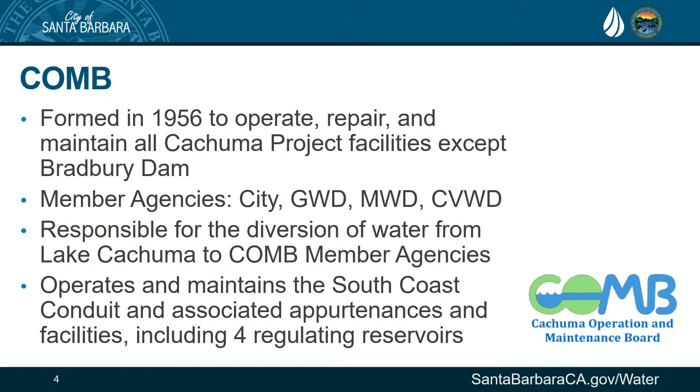COMB is a joint powers agency formed in 1956. They operate, repair, and maintain all Cachuma project facilities except for Bradbury Dam, which the U.S. Bureau of Reclamation maintains control of. There are 4 member agencies in COMB, including the City, Goleta Water District, Montecito Water District, and Carpinteria Valley Water District. COMB is essentially responsible for the diversion of water from Lake Cachuma to those member agencies via the Tecolote Tunnel and the South Coast Conduit, which carries water all the way down to Carpinteria.

In April 2025, COMB and U.S. Bureau of Reclamation staff decided to inspect the portion of the South Coast Conduit that travels within the Sheffield Tunnel. The Sheffield Tunnel is a 6,100 foot, 6-foot diameter concrete tunnel that houses the South Coast Conduit. This portion of the conduit is 30 inches in diameter, formed in 12-foot segments joined together by 503 steel bands with double gaskets coated in mortar.

You can imagine at the point where those concrete segments come together, there could be some potential issues. This pipeline is over 70 years old and has actually been performing very well, but it was good to get eyes on it with this inspection, and they did find some significant issues.

15% of those 503 joints had severe mortar cracks, or the steel bands were cracked or otherwise compromised. I tried to include some pictures here showing a grading system of the different deficiencies found in the pipeline. In the upper left picture you see a type 1, a pipe in good condition, and working down the columns it goes from 1 through 6, with deficiencies getting progressively worse. That 15% were deficiencies rated type 4 or worse.

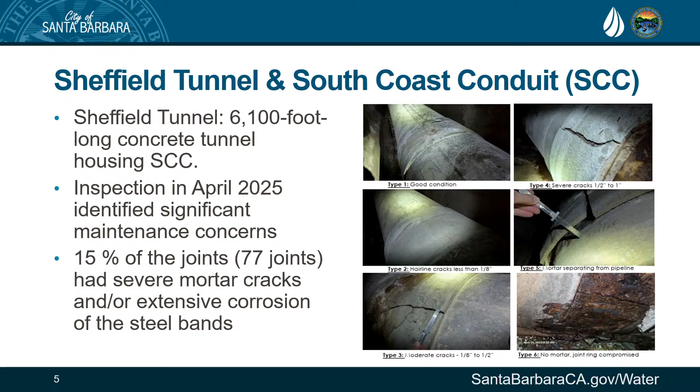They are making repair of these deficiencies a top priority. The first thing they're doing is monitoring tunnel intrusion to make sure the problem doesn't get any worse, establishing a baseline understanding of any water currently seeping out of the South Coast Conduit into the tunnel, and monitoring that flow to make sure it doesn't increase, which would indicate a worsening leak.

They want to do a video inspection of the inside of the pipe. So far they've only been able to lay eyes on the outside of the pipe, and they want to get an idea what the condition looks like from the inside. They plan on doing that this winter.

In the meantime, they're looking at different technology options to repair the pipeline. A large diameter pipe like this can be difficult to repair, so there are several different technologies they're exploring. Right now, it seems like what's floating to the top is a continuous internal semi-structural pipeline liner.

At their September board meeting, the COMB board members approved improvements to the Sheffield control station, which would replace 2 large diameter valves. Those valves are over 70 years old and don't currently seal properly. Making improvements at those valves would allow staff to both isolate sections of the South Coast Conduit, reducing the risk of catastrophic damage, and allow staff to perform camera inspections, emergency repairs, or pipelining within that closed space environment.

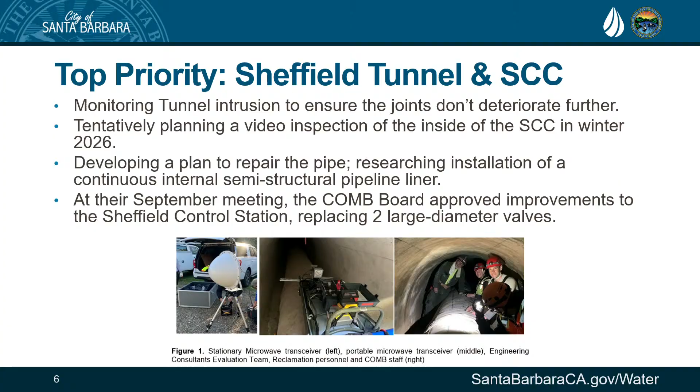I just want to add that the city does have representation on COMB. I'm currently the chair of COMB, and we do have voting status and have followed this along, and it was unanimously approved to continue with this work.

In addition to the Sheffield Tunnel, COMB is a small but very mighty agency, and they accomplish a lot. They do regular facility maintenance on all of their facilities, everything from the intake tower at Lake Cachuma all the way through the South Coast Conduit.

They work hand in hand with reclamation staff in support of the federal consultation process with the National Marine Fisheries Service, and more importantly, right now, implementation of the state water rights order, which has to do with how much water is released from Bradbury Dam in support of Steelhead downstream.

They also recently served as the lead for the member agencies on the reclamation-mandated contract compliance review. Because we have a contract with the Bureau of Reclamation, every 5 years we do a review of our contract, making sure we're following all the rules and sending water only where it needs to go and to the right types of users. COMB took the lead on that, which was really helpful to us member agencies.

They do really excellent monitoring and modeling of Lake Cachuma elevation, so they're always anticipating when we might need to install the emergency pumping barges, and also water quality so we can best utilize the resources in Lake Cachuma.

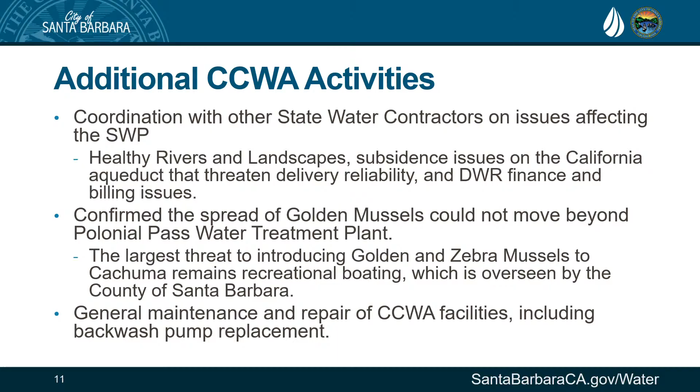Moving on to our third and final agency, we'll talk about the Cachuma Conservation and Release Board, also known as CCRB. CCRB is another joint powers agency formed in January 1973, and their focus is protection of Cachuma project water rights. Currently members are the city, Goleta Water District, and Montecito Water District. Carpinteria Valley Water District used to be a member but is no longer. It's interesting because the U.S. Bureau of Reclamation, on behalf of the Cachuma project member units, holds the water rights permits, but CCRB is the agency responsible for the actions and decisions, kind of the unified response relative to the terms and conditions of those permits for the member agencies.

Some of the things they work on are issues related to downstream releases of water from Cachuma for the benefit of the protected steelhead or rainbow trout, and also any other water rights or water supply issues on the Santa Ynez River related to the Cachuma project. So a lot of what happens at CCRB happens in closed session because there's often anticipated litigation since we're talking about water rights.

But some of the things they've been working on in the last quarter include continued coordination with COMB. They meet, I believe twice a month, with reclamation staff regarding the federal consultation process with the National Marine Fisheries Service. Recently, the COMB board voted to make supporting reclamation's effort to complete the biological assessment, which is one step in the consultation process, a priority. So there's quite a bit of resources and effort going into that right now.

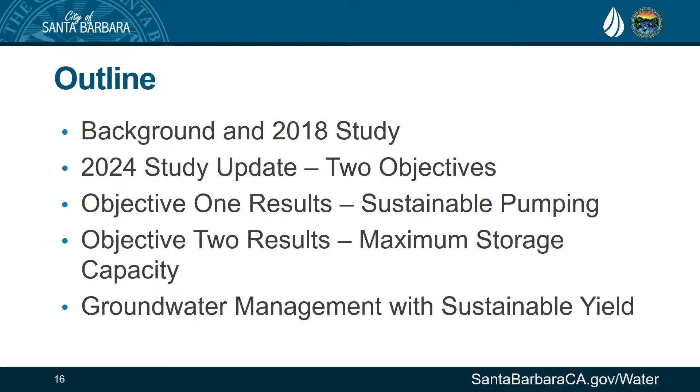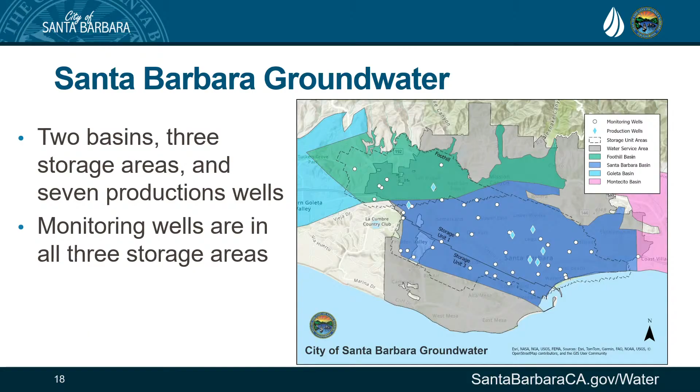The first major groundwater study that the city of Santa Barbara did was in 1989. We call this the Freckleton Report, and this established the groundwater basin boundaries and estimated recharge.

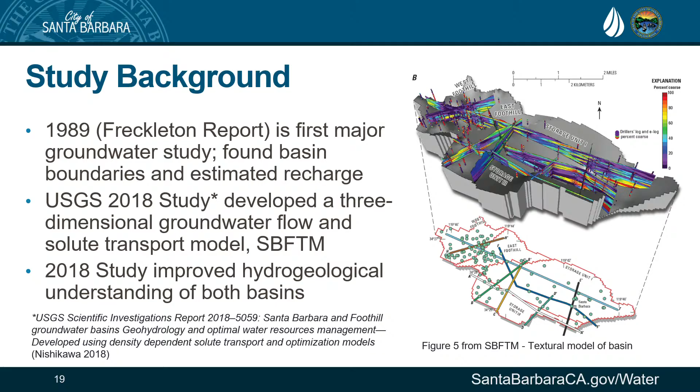This study was really important—it improved the hydrogeological understanding of both basins. On the right, I'm showing a screenshot from the 2018 study, meant as an example of some of the modeling that was done. This is showing the textural model of the basin, both vertically and laterally.

The 2018 study modeled maximum groundwater drought storage, or the maximum water available to pump during a long-term drought—sometimes you may have heard us refer to this as the drought yield over 10 years. The results are used in the annual water supply management report and the city's 2020 enhanced urban water management plan. On the right side of the screen, you can see the results of that study by basin, and the total drought storage was estimated at over 24,000 acre feet.

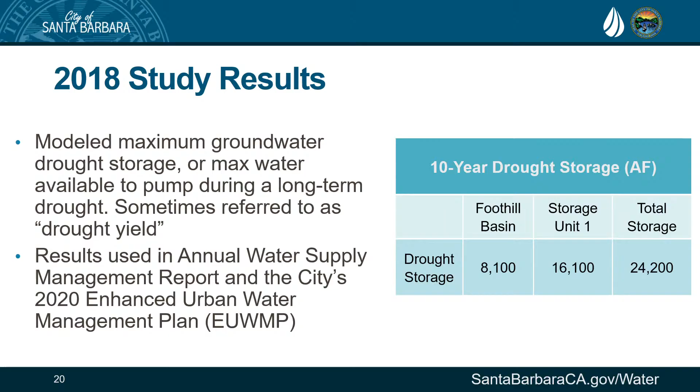So why was an update needed when we had the 2018 study? The main reason is that the drought storage assumes maximum pumping, and it doesn't align with our city goals to minimize drawdown in Foothill Basin and then minimize seawater intrusion in Storage Unit 1.

And in the model, when it maximizes pumping, it's acting kind of like a sponge. So it's filling up the sponge and then wringing it out with pumping over and over throughout the model run, so that creates more room for storage.

And the 2020 Enhanced Urban Water Management Plan recognized this discrepancy between maximizing pumping and city goals, and they actually recommended a 10-year drought storage that is revised to equal our volume pumped during drought. So you can see that in the bottom right there, that's the 10,500 acre feet.

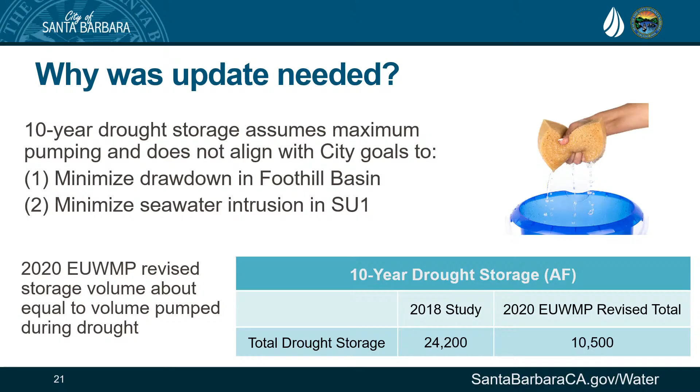So in addition to this first recommendation to revisit the 2018 study, the 2020 Enhanced Urban Water Management Plan recommended that the city consider developing a groundwater sustainability plan. And this is a GSP Lite, and this is one of our discussion topics for later on in the presentation.

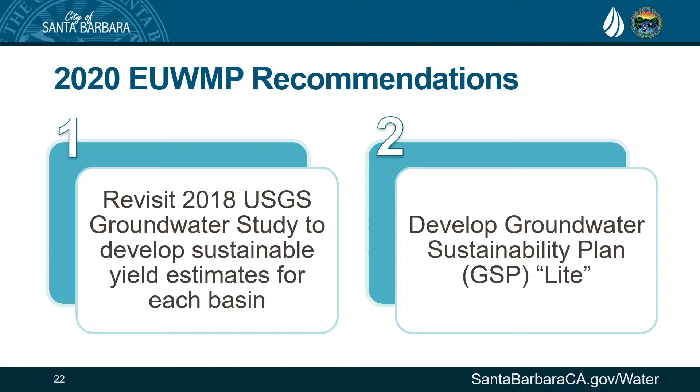And with that, I'll dive into the 2024 study update.

So as I mentioned, the city has different management goals for Foothill and Storage Unit 1. And with that in mind, the basins were modeled separately for this update, which is different than the 2018 study. The objective is to find sustainable yield, which is defined as minimizing drawdown in Foothill and then minimizing seawater intrusion in Storage Unit 1.

And to do this, USGS developed Excel-based dashboards for us, and that allows us as staff to model and view modeled output based on those goals for each basin.

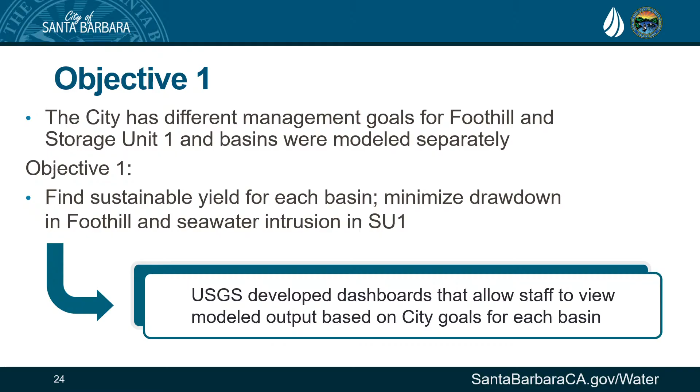And there were many assumptions in the model, so this is an overview of the most important assumptions. Precipitation records were the same for each model run, and those cover from 2004 to 2013. And those represent a typical period that includes some rainy and some dry years.

There were 3 different basin conditions considered. There's empty, which is based on 1990 conditions, a recovered basin, which is based in 1998, and then recent, which is from 2013. And those were chosen because they're at the end of the calibrated model from the 2018 study.

And then since these dashboards are based in Excel, they're limited to the amount of data they can hold. So the modeled pumping is limited to levels that will have little to no storage change. So it's not every available result.

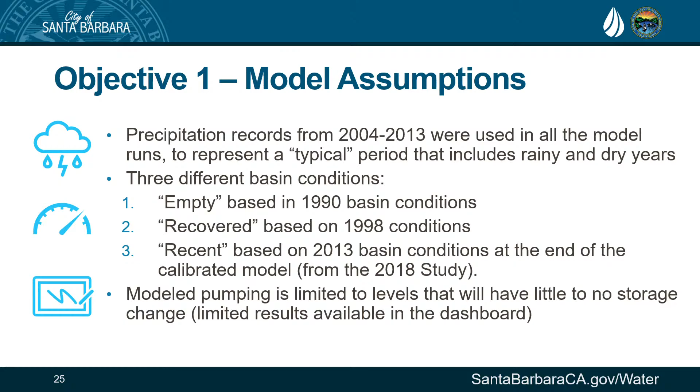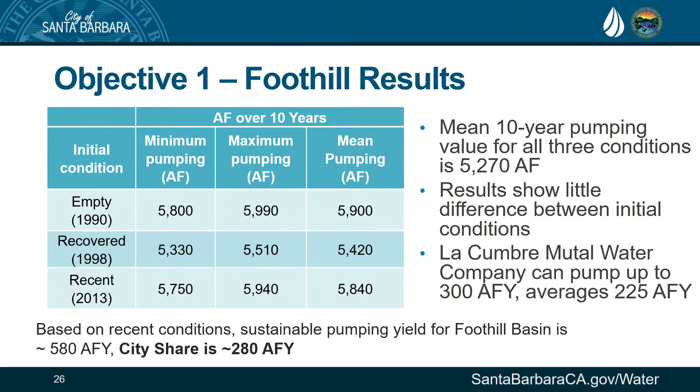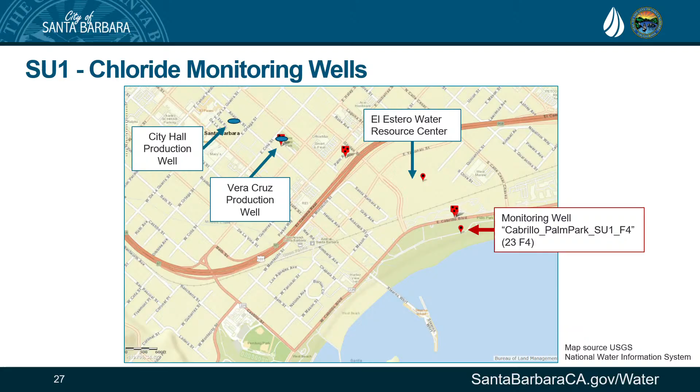For example, starting with an empty basin, the maximum sustainable pumping would be 290 acre feet per year. And then starting with a more recovered or full basin, you can go up to 775 acre feet of pumping per year without increasing chloride conditions. And using recent conditions, the sustainable pumping yield for Storage Unit 1 is 700 acre feet per year.

Just a quick question. How empty is empty? It can't be fully empty, so... yeah, it's a good question. It seems like you wouldn't draw it all the way down.

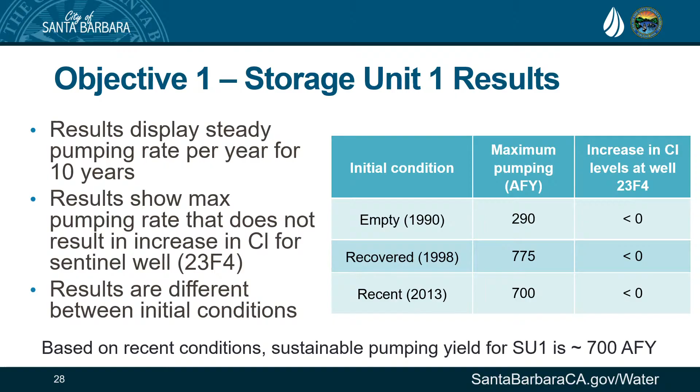It's based on the 1990 conditions, which are real conditions in the model, and the basin was pretty pumped. What would you say, Joshua? Pretty pumped, yeah.

Question for you: is there some thought to how to optimize the storage capacity of the basins? In other words, if we have them completely full but we've got a number of very wet years, we're losing the ability to capture some of that runoff. So is there some play involved in this, even if we really don't need the groundwater, but we want to maximize the storage capacity of the basin? Those are exactly some of the questions we had going into this, and we've got some slides here to show you how we honed in on that.

For objective 2, we're going to start talking about storage. The second objective was to determine the maximum storage capacity in acre feet for Foothill and Storage Unit 1. To do this, USGS went back to the model and used the SB FTM to model storage change in each basin without pumping.

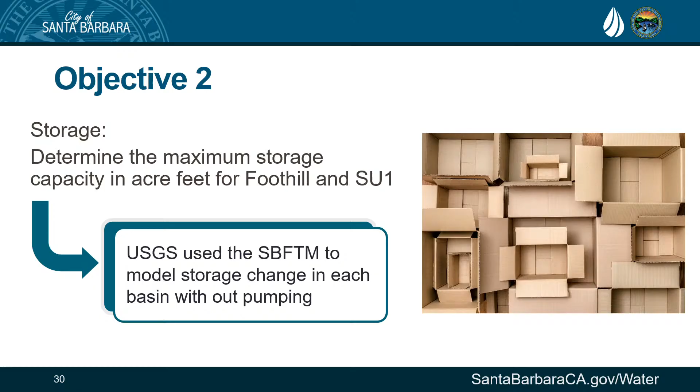The approach starts with those 1990 empty basin conditions, assuming zero groundwater pumping, and USGS modeled groundwater change in storage over 10-year periods. They then linked those model runs together until the change in storage flattened out or became insignificant, which took 40 years, or four 10-year model runs.

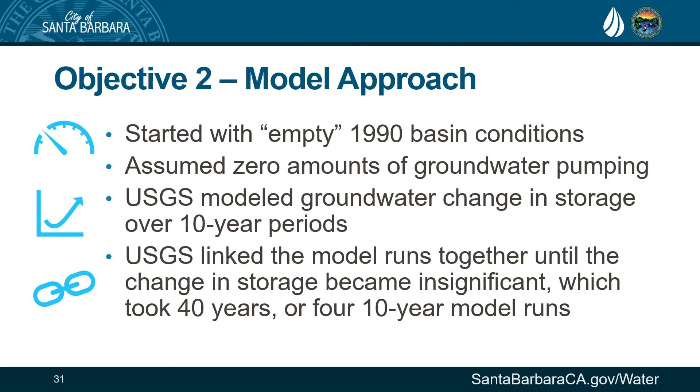A note about the scope of modeling for storage capacity only: to go back to the sponge metaphor, this is acting in the model of just filling the sponge and figuring out the volume the sponge can hold, never wringing it out to create more room.

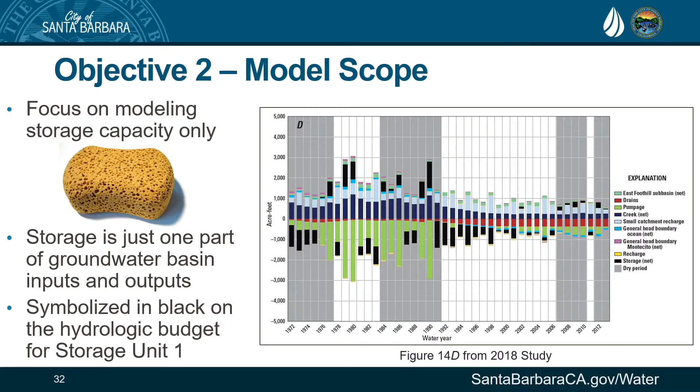Storage is just one part of the groundwater basin inputs and outputs. It's symbolized in black on the hydrologic budget for storage unit 1. This is figure 14D from the 2018 study. There's a lot going on there, so I wanted to draw your attention to the black storage bars, and then in green is the pumping, that light green color, symbolizing all that pumping going out and creating more room in the basin.

In the first 10 years, storage unit 1 shows 6,600 acre feet of storage, and foothill storage is 4,300 acre feet. At the end of the 40 years, total storage for storage unit 1 is 9,500 acre feet, and foothill storage is 6,400 acre feet.

So Commissioner Young, this gets to your question: at some point we could sit and wait, but you're not getting as much benefit out of the basin by waiting. That helps us hone in on this sustainable yield question. There's an optimum time when we should be taking water out of the basin, because sitting and waiting around isn't really gaining us a ton of extra storage.

So where are we on this chart right now? That is a good question. I have some current slides in the discussion part of the presentation.

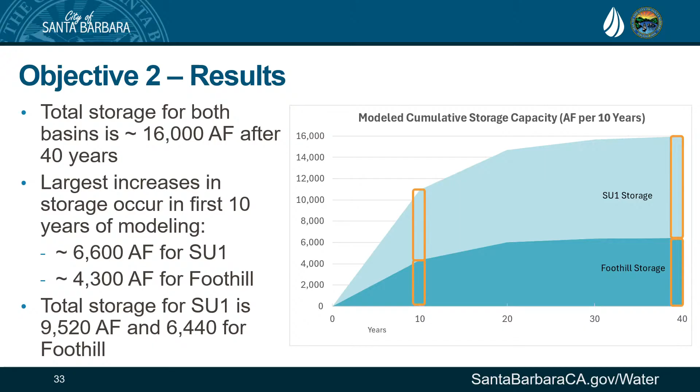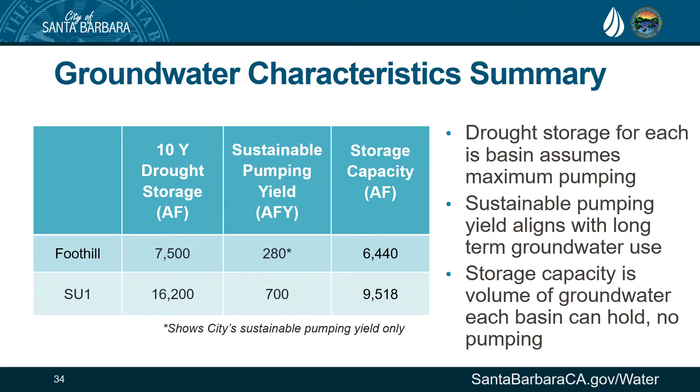And now we'll talk about some of the discussion topics.

Here I'm showing the sustainable yield again, and the total amount is about 980 acre feet per year, which represents about 9% of our current city potable annual water demand. We know that groundwater is hyperlocal, and it could offset the use of more expensive or energy-intensive water sources.

It looks like there's a question. Quick question - would La Cumbre district be separate from this? Yes, this is correct, just the city. I took out La Cumbre's 300 acre feet per year.

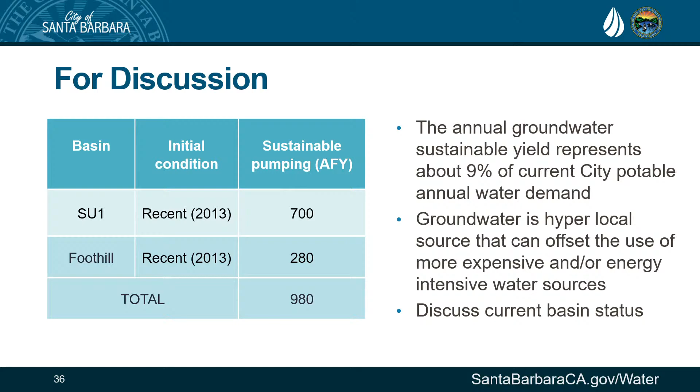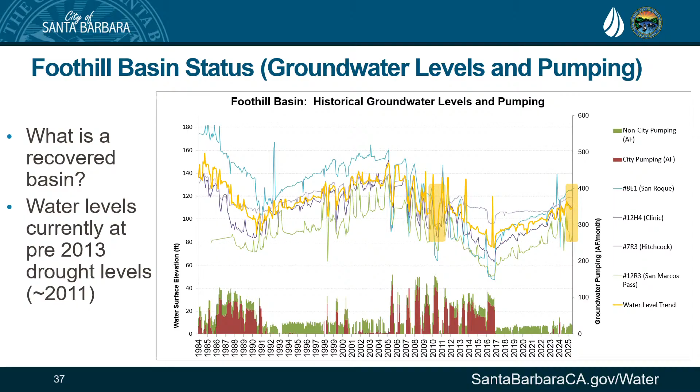In storage unit 1, we are not worried about water levels. Those have completely recovered since the drought, and many wells are actually artesianing.

This is showing the Sentinel well again, that 23F4 well, showing the chloride levels in milligrams per liter from 1986 to our most current reading from June. Chloride levels are trending down. Focusing in on the period with the lowest chloride levels, 1998 to 2014, they averaged about 6,000 milligrams per liter. We're getting very close to that average.

So I think, getting to the point you're talking about, we're a year or two out from reaching that spot where you'd say they are fully recovered, or what we would consider - I wouldn't say full, that's not the right word - but some safe operating space where we would want to consider starting to pull out the sustainable yield from the basins.

I don't know how difficult it is, but it would be very interesting to see the cumulative volume, because the elevation is hard to translate into what percent of the storage we're at.

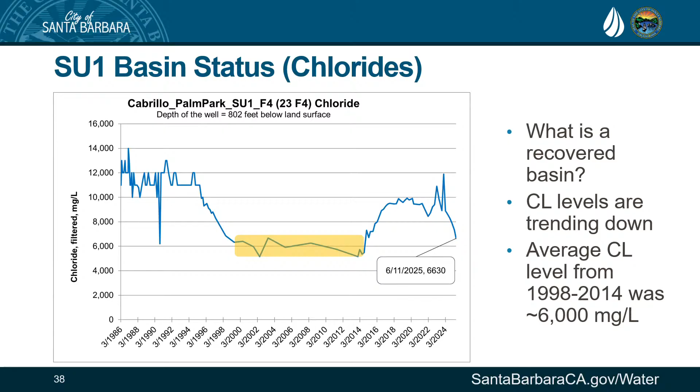I think it leads into that conversation of, for staff, trying to come up with some SOPs - standard operating procedures - for when we consider that threshold met, working from both sides of elevations and what the model is giving us, then correlating that with staffing resources to do this. Currently we turn our pumps on about monthly to run them, take water samples, then shut them down. But putting them into full operation is a pretty big stretch for staff currently.

So trying to figure out how we're going to sustainably pull that water out with the staffing resources we have is something that, with the conversation today, we need to start wrapping our heads around. Our intent is to come back as part of the spring water supply planning update and have more of a conversation about where we landed with our resources to start doing that, and when we project that might occur.

Thank you. Thank you. Joshua covered the second bullet very well here.

The first bullet concerns the second recommendation from the 2020 Enhanced Urban Water Management Plan, which is to consider developing a groundwater sustainability plan. It would be helpful to have guidelines for managing this basin, and to work with other pumpers in the basin to sustainably manage it now that we have more data.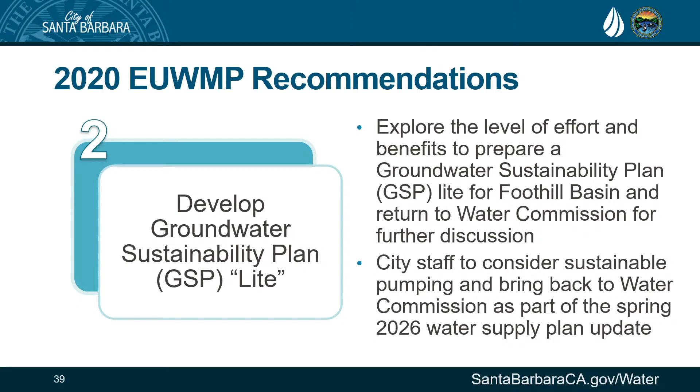And with that, I'm on questions.

We were experimenting with injecting water into the basin, so where does that fit into this overall discussion? Would we benefit by injecting surface water into the basin during certain times? I think that's what we have to explore. If we're taking out the sustainable yield, you wouldn't be pumping water into the basin, so that's another factor to weigh in.

We found it viable to put water in the basin, particularly when trying to recover it, but the water goes into the basin really slowly. You get far more benefit from natural recharge than from putting it into the groundwater basin. In 2023, when we had an abundance of water and the basins were still recovering, it made complete sense to tap into that resource and recover it quicker. But the margins of how fast we're accelerating it, putting 200 gallons a minute in the ground, is pretty slow. That would be an important part of the groundwater sustainability plan, to have guidance on when to inject and when to sustainably pump.

Yeah, that makes sense. And then what about the issue with the regional board that was concerned about water quality impacts from injecting surface water into the basin? Where are we with that?

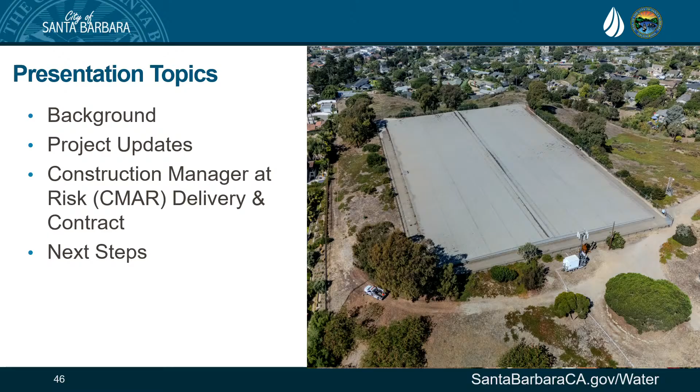So as you know, Vic Trace is located in the Alta Mesa neighborhood. It's one of the largest parcels in that neighborhood, and that was on purpose, and we'll talk a little bit about that. It was built in 1956 and named after Vic Trace, a huge figure in Santa Barbara's history, who served as the water system superintendent from 1900 to 1935 and constructed the Gibraltar Reservoir. So siting that reservoir was a major effort and was fundamental to Santa Barbara's growth and development. The reservoir serves as the hydraulic gradient for the entire water system, so we're fortunate that the majority of our water comes from gravity feed. And so this is a critical facility.

It currently stores 10 million gallons. It's the second largest reservoir. It serves 60,000 people in the city, approximately 70% of the city served from this site. And we've done a lot of diligence on what to do with this reservoir. We're currently at about 15% design. I don't want to steal too much of Ms. Bork's thunder, so I'm going to keep this moving.

Wait, who are the folks on the right? Oh, sorry, let me point that out.

Was that the Water Commission? Yeah, not the original Water Commission, but Vic Trace, who you see on the left, he was appointed by the first Water Commission, and that's his family. On the right, you can kind of see him in the top there. There is a great history that we've provided and can provide publicly about Vic Trace. He's got quite the story. There's a lot of news articles and things written about him.

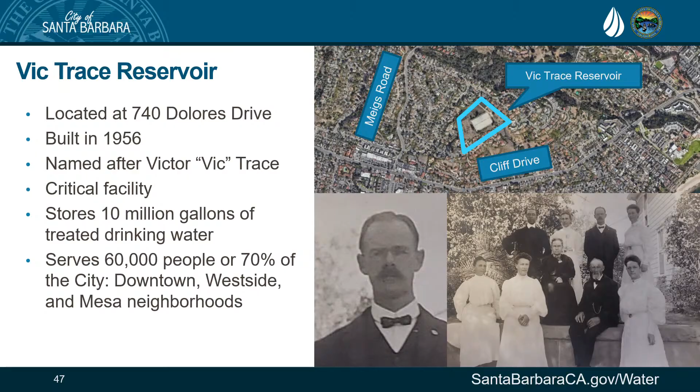Mr. Chair, I really enjoyed reading all of that, and the idea of pushing it up onto the website—I think as community context and history, it'd be worthwhile. It's a big project, it's going to get a lot of recognition once we go into construction. So I think that type of context is really, really interesting as well as very important. So thank you for what you've done.

This project is the largest project that the city is going to embark on, and it's just one portion of the capital work we're doing right now. Going back to the last presentation, the drought really consumed a lot of resources, a lot of staff time. We had to put a lot of new infrastructure in place, and now we're really shifting our focus to catching up on the infrastructure that needs replacement. As you'll see in the next slide, this reservoir is certainly due for replacement. We've been talking about it for a couple decades, and here we've arrived at 15% design. As you can see by the pictures there, the infrastructure is really ready—a lot of what you see here has been replaced, but it's a bandage approach, and we're beyond bandage at this point.

One of the things that's a big focus of CMAR is to minimize costs—really to try to control costs, to make sure we have a very dialed-in design, and that construction considerations are brought to the forefront of the project while we're in design. It'll address seismic risk, ensure water quality, tighten site security, which has actually become a big item for this project as we've been talking with all the community members. They've really emphasized some of the trespassing that's occurred. So site security is going to be a big one for this, and we'll be able to learn a lot through this project about the latest technology that's available, and we'll be able to capture stormwater on site better.

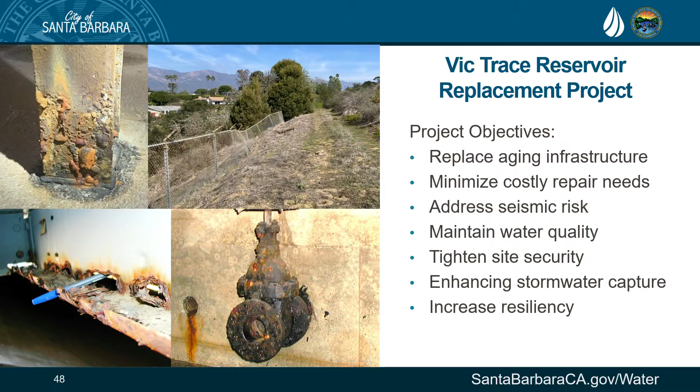And with that, I'm going to turn it over to Ms. Bork.

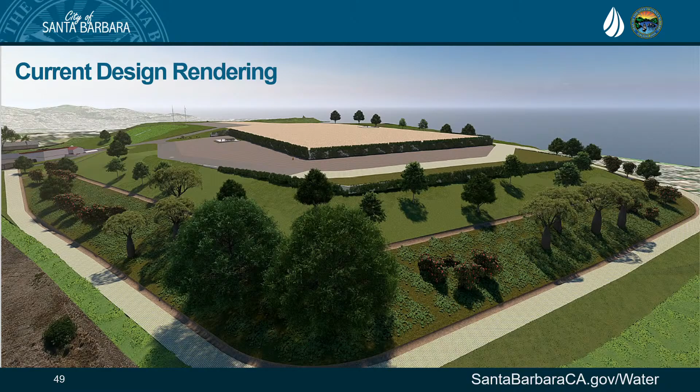This is the project update portion of the presentation. What you're seeing here is our current design renderings. We completed our 15% preliminary design back in February, and since then our team has solicited opinions, feedback, and design criteria on our early design—not just from the public, but from many different departments at the city: police, fire, parks, IT. This site really touches a lot of operations at the city. We also presented these renderings to the Architectural Board of Review in June, so we'll be incorporating their feedback too.

For community outreach, as a reminder, we completed our strategic communications plan and developed a project website last year. Since speaking with you all in February or May, we did our preliminary design workshop at Monroe Elementary, which was really successful. Since then, I've also engaged with the Santa Barbara Neighborhood Association and presented to them. What we're most excited to share is we conducted our first neighborhood meet and greet about two weeks ago. We didn't have time to count, but we had probably over 30 different neighbors come by, with dogs, and it was really fun—probably over a hundred questions and lots of feedback. We had about five team members there, which wasn't even enough because it was really well attended.

Some of the major themes we're hearing, beyond wanting more information, include fencing and security—how are we addressing each of the neighboring homeowners? There are 24 or so that back into our property. Also questions about water service outages, public access to the site, noise, biodiversity, and radio towers. A new one for us is how we handle possible damage during the project—during demolition, if someone suspects damage to their property, what does that process look like? That's a great example of something that wasn't on our radar before meeting with the community.

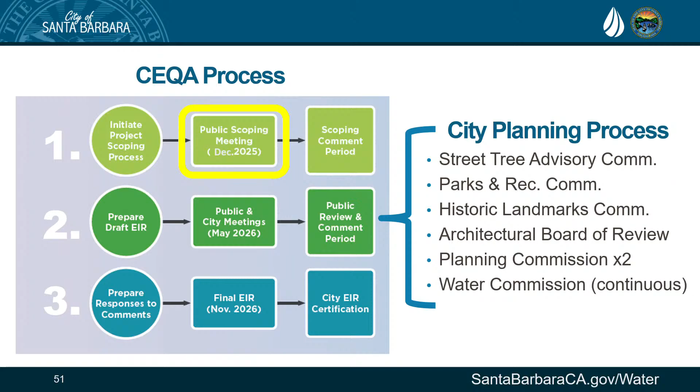That concludes the bulk of the project updates, and now we'll move into describing alternative project deliveries and the construction manager at risk method.

In March of last year, the city's voters approved a measure to allow these alternative procurement methods for city projects, and that has since been incorporated into the city code. What we mean by alternative project deliveries, those are just different ways we can award construction contracts for our construction projects. So before this vote, pretty much our only avenue was awarding these via low bid. So as long as a contractor met licensing and some qualifications, whoever had the lowest bid was awarded the work.

So best value has one we've been doing for the last couple months on several projects, the police station, Dwight Murphy Playground, Carrillo Gym, some other ones. And what that one does is it allows us to not only evaluate the cost, but to evaluate their proposals, so their qualifications, past experience on city projects, and so on. And that essentially becomes a dollar per point or a point per dollar evaluation.

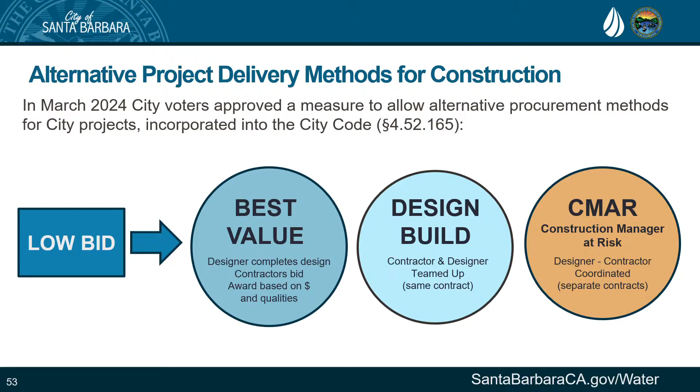Scheduling, strategic sequencing, here is what's really important. The designer's usually not on the hook for outlining the schedule of how this project gets built. They're like, I don't want to specify scheduling. That's on the contractor. So sometimes you don't even have those conversations until much later. So having the CMAR on board, we can balance how to sequence all of the different components of this project with limiting disruption to the community.

Risk review, that's an accounting of all the different risks that are happening on the project, so contingencies, and ultimately that leads to less change orders. Community involvement, the contractor's now part of the team, so they can attend these meet and greets, they can attend different community events. And then lastly, this guaranteed maximum price. So what this is, at each stage of design, the contractor is going to give us a very transparent, probably thousands of rows of cost data saying this is how much we'd essentially bid this project at. So we'll negotiate that and be reviewing that throughout the design, and then ultimately at the end of the design at 100%, they will give us this GMP, and so long as we agree to it, then we'll award the project.

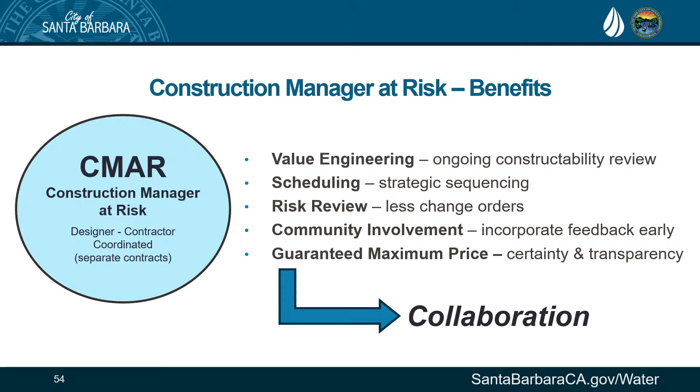Quick question. This is my first exposure to this kind of process. I'm assuming other agencies have seen this before, in terms of larger construction projects. And the guaranteed maximum price - going back in all my years of watching big projects, it's change order after change order after change order. How guaranteed is that?

It will be less, but as we get these cost accountings and cost estimates, there's still the responsibility of the owner and our designer to say, what is that number and how much risk is being built into it? It's not that they're hiding it, it's just hard to go through line by line. So the reduction in change orders is about asking, what is the risk here, why is it so expensive, and then discussing that and parking it in a risk registry.

Like, for example, our oil well on site - they throw out a number saying it could be 5 million because what if we find X, Y, Z. So we can set aside a discussion to really understand best case, worst case, instead of that becoming a change order during construction.

So we've done our due diligence, and what's left - what I understand change orders should really be - are the unknown unknowns that were unknown to everyone. But it's the responsibility of the project team to suss out those possible change orders early.

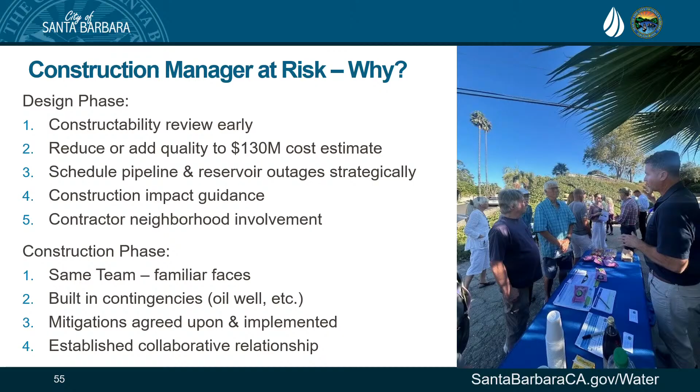Once we decided to move forward with CMAR, we conducted an RFP process similar to when we hire designers or consultants. That was conducted this summer. We received 4 proposals from 4 very large construction firms. We conducted interviews, in-person interviews with all 4, some follow-up interviews, did reference checks, and also evaluated their proposals. And I will say, all 4 were incredibly capable.

There was no wrong choice. They were all just spectacular, and we learned so much—it made the choice very difficult for us, but ultimately we chose Garney Pacific.

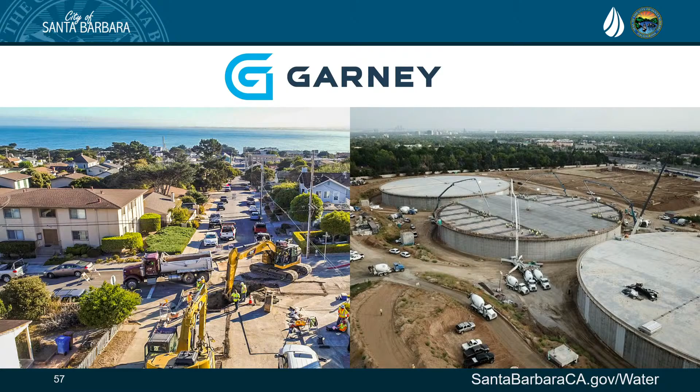The project's timeline remains unchanged as of today. For the next year, we'll be focusing on CEQA and the planning application and continuing to have community feedback. In 2027, we'll focus on completing design, and we still anticipate constructing from 2028 to 2031.

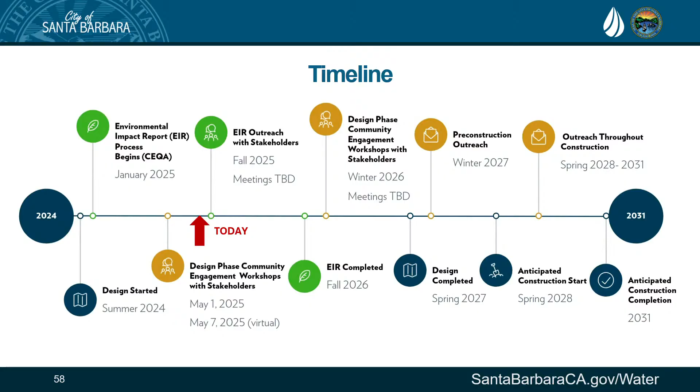Our budget at the moment still remains unchanged—that number is still $131 million total. As we hopefully bring on the CMAR, we'll be diving into this number in more detail. We're still anticipating submitting for SRF funds, that low interest loan, in December of next year, and then possibly looking at other funding avenues and municipal bonds.

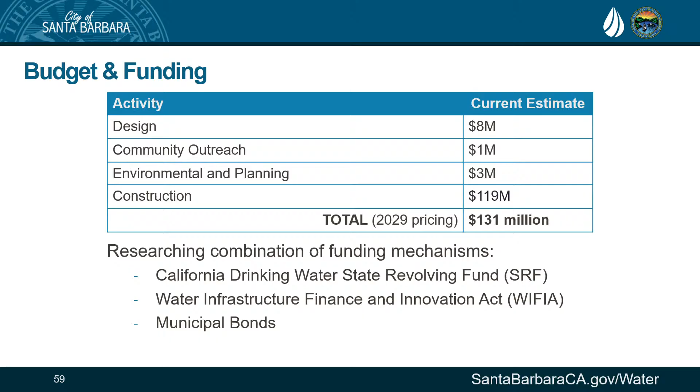That concludes the presentation. Our next step is to come back to Water Commission ultimately with that contract. As Matt mentioned, we're engaging with different legal firms to really firm that up—we don't want to sign something that has some ambiguity to it. Secondly, we'll be reaching out to the community for that upcoming CEQA workshop, which we're anticipating will be in early December. So thank you, and happy to answer any questions.

Question: coming out of COVID, we had a lot of inflation on materials, supplies, things of that nature. Have we seen that plateau, or are we still on a rise?

It's hard—we don't have a ton of data points because the last few years have been a wild ride. On average, we've seen about 20% a year for construction costs. It does seem we're getting more bidders now on projects, so there's a growing hunger from the construction community to lock up work in the future, which has kind of stabilized costs a little bit. Again, hard to say conclusively—we don't have a lot of data points, but it's something we'll be watching closely. We're hoping, again, costs aren't going to go down, but we are looking for them to hopefully flatten out. Those costs we provided are a projection out to 2029.

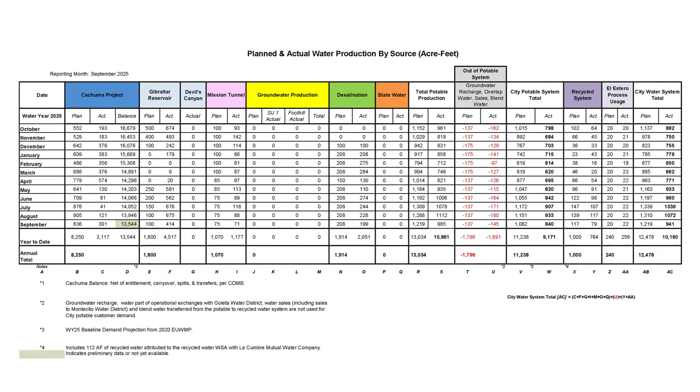I just wanted to note, if you look at the Santa Barbara County rainfall report, we are currently at almost 500% of a normal year. Yeah, and 12% of our normal year's rain in just late October. So it's crazy, it's one of those screenshots you just want to keep. It's amazing how, with just a little rain, 2 inches, we're already there.

I would just like to take this opportunity, just so thrilled about the new organization and the new position, congratulations. The city is going to be so well served and could not be more pleased. Thank you. Thank you very much, appreciate that support.

Any other questions or comments? I'll add, I liked the AI. I could tell it was AI font or bullet points, and it was a nice summary of what was already here, so I liked it. Takes 10 seconds, it's really amazing.